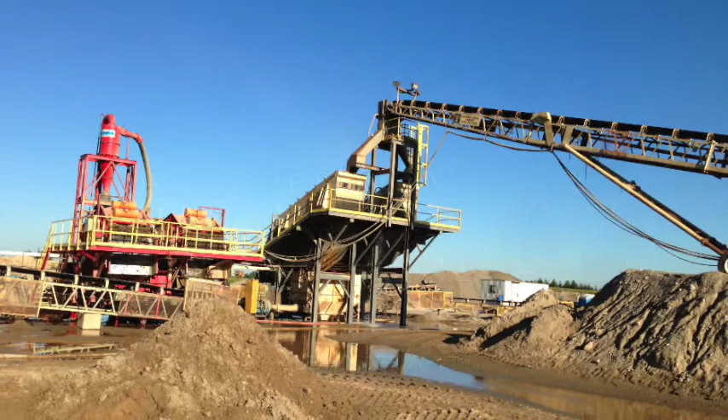For my presentation, I will be talking to you about the importance of building materials, a little history of St. Mary's and CBM aggregates, some background about Aberfoyle, McNally, and David sites, some of the major products produced, the hydrology and rehabilitation process. Also, we'll be talking to you about the processing of the aggregates, the quality control of concrete, asphalt, and foundation, and the quality control issues that come along with them.

We will be talking about 19 mil concrete stone, concrete sand, granular A and B, and then I will follow up with my conclusion, recommendations, and for you to ask any questions.

The importance of building materials. Building materials such as concrete, asphalt, and foundation are seen on almost every construction site around the world. Foundation material like granular A and B are usually intended for subbase within the pavement structure and backfill for construction projects. The foundation is used to establish solid and secure ground before erection of construction projects.

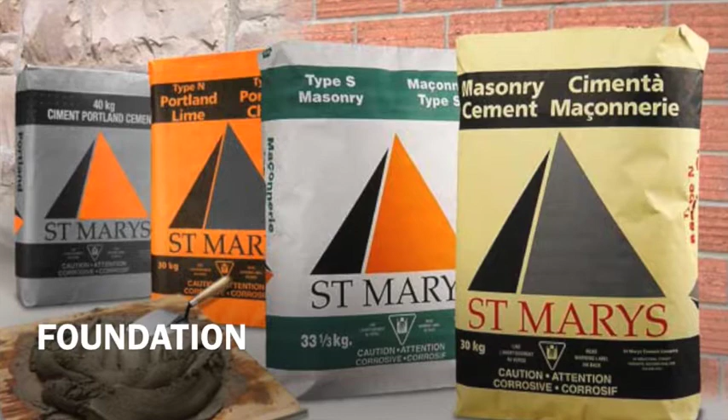Asphalt is the main component of the world's roadway system. It is laid on top of the foundation to create a surface that can temporarily withstand heavy pressures and harsh weather conditions. Concrete is a building material that is heavy and structurally sound to create and form a building or structure. This building material has been one of the most important to the world since it has erected long-lasting construction projects.

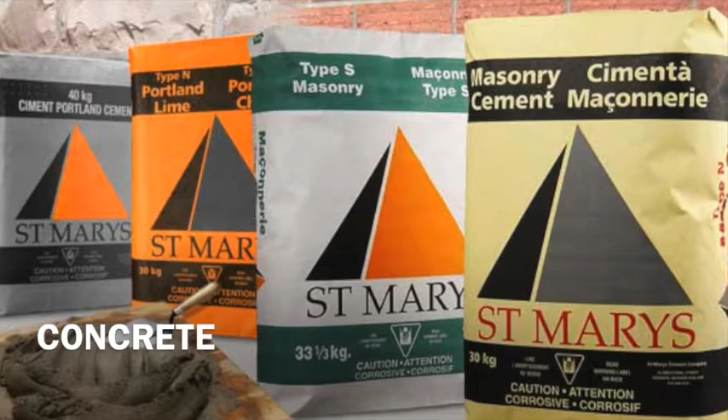St. Mary's Cement Group. St. Mary's Cement Group was founded in 1912 by John Lind and Alfred Rogers. The company is able to produce over millions of metric tons of material annually and helps to provide for Canadian and U.S. customers. Some of the projects St. Mary's Cement Group are best recognized for are the CN Tower, Maple Leaf Gardens, and the Roy Thomson Hall.

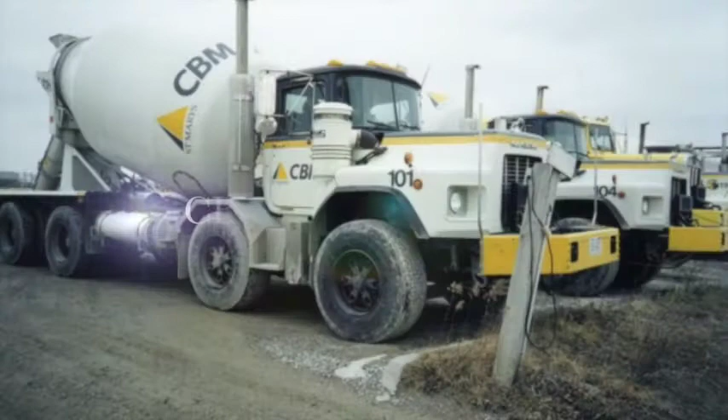CBM Aggregates. CBM Aggregates is a part of the St. Mary's Cement Group operation by producing over 140 million tons of aggregates annually for ready-mix trucks and construction sites. There are over 450 ready-mix trucks provided by CBM that deliver mixing machines that have made-to-order product that is usually time-sensitive. The construction sites may use the product for concrete, asphalt, and foundation. St. Mary's CBM has 12 sand and gravel operations and quarries that are in operation year-round.

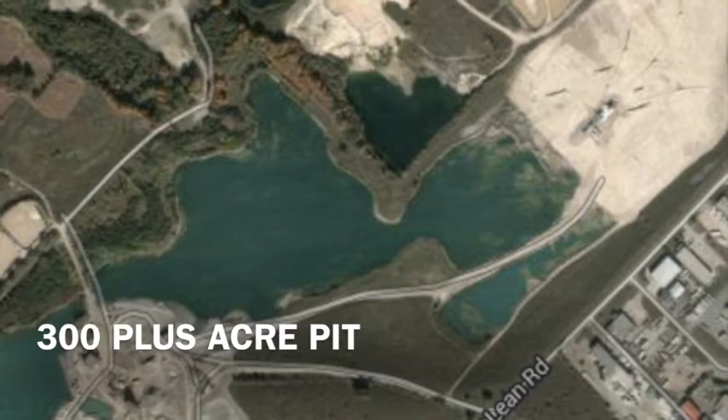Aberfoyle site. For my co-op, I worked out of the Aberfoyle pit. It is 300 plus acres and has been in operation since the 1950s and is considered the main site for CBM aggregates production in Ontario. The Aberfoyle operation is well monitored and has great production of the various building materials.

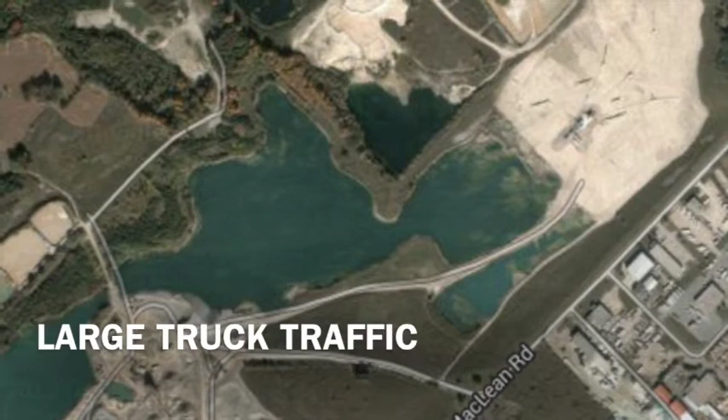This site has 3 front-end loaders for the material movement and 4 material conveyor belts with smaller conveyor belts for separation of material. This allows for a large quantity of transportation truck traffic and building material production. Aberfoyle Sand and Gravel Pit produces a variance of materials from coarse concrete stone to fine concrete sand.

The McNally site. Located across the road from Aberfoyle Pit, it is also operated by the Aberfoyle management and is sometimes considered Aberfoyle South. The McNally pit creates material for concrete and asphalt like Aberfoyle, however creates material more acceptable for asphalt elements. This operation creates HL8 for coarse stone products and HL3 material for asphalt density. McNally pit creates approximately 10 different products that vary from concrete aggregates to asphalt material.

The David site. The David pit is operational in Cambridge, Ontario. The David site is also only a short distance from Aberfoyle, and therefore the testing of material quality is completed by Aberfoyle's quality control. The David Operations is a large producer of granular A and granular B.

The David pit has one of the newest material shakers and is highly efficient when producing material for low moisture content. On average, a regular material shaker will have 24% moisture content, whereas David site's new material shaker will have 6% moisture content, saving a lot of material from being washed away.

The major products. CBM has numerous products available including concrete, crushed stone, round stone, and sand products. Each product is used for our ready-mix trucks that use different techniques of maximizing concrete.

The hydrology and environmental process. The Aberfoyle plant has been known for its hydrology and environmental process. The Aberfoyle plant works in a cycle starting with the lake, which is used as the Aberfoyle plant's only water supply by washing the material that is placed in the material shaker and separator. After the material is washed with the lake water, the water is then drained back into the ground for filtration and circulated back into the lake to be recycled.

The quality control technician sieves the recycled water periodically from the plant to examine how much material is being lost from the manufacturing process. After a period of time to allow for material to settle, the lost material is recycled into the plant and restored for production use.

The water that is recycled is clean and great for wildlife due to the filtration of sand and gravel throughout the Aberfoyle site. The water that is coming from the plant may look dirty, however, after settlement of the sedimentation, the water is clean and can support various wildlife.

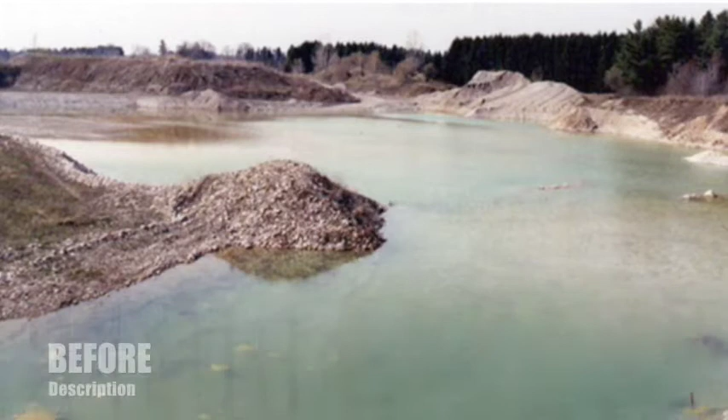Rehabilitation. Since the Aberfoyle pit has been in operation since the 1950s, the natural state of the grounds has been progressively rehabilitated. Over 30 hectares have been rehabilitated to support new agriculture, naturalized areas, ponds and aquatic wildlife, and a green environment. Rehabilitation of the Aberfoyle site has included land shaping, wetland and shoreland creation, seeding, aquamats, breeding grounds, and protected cover, and also ongoing tree planting.

This is a before and after of rehabilitation of a sand and gravel pit which has produced materials for Ontario for many years. This advancing rehabilitation process in the Aberfoyle sand and gravel pit has thriving wildlife and environmental structure that is returning the land back to its natural state. Aberfoyle Sand and Gravel Pit has achieved an award of excellence for the cooperation of environmental and business success within the Aberfoyle location.

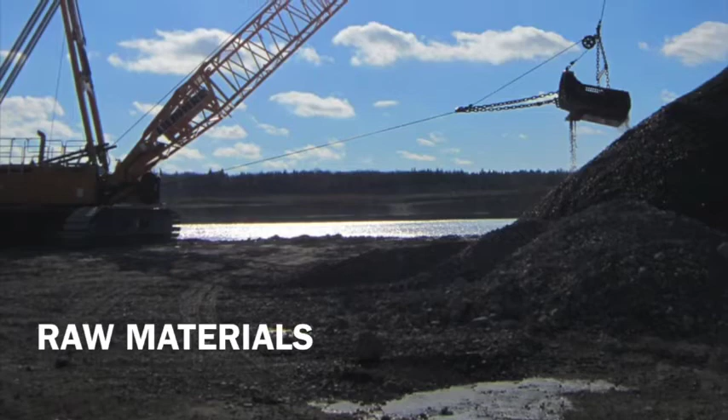Processing of materials. Processing of materials in CBM aggregates begins with raw materials. The raw materials include large and small stones, gravel, sand, and clay. The clay will be mostly disposed of through washing. The raw materials are mined and produced through quarries and the use of the dragline dredging crane, which is used to reveal raw materials that are then transported with conveyor belts and trucks to the Aberfoyle location.

The excavation process for Aberfoyle's site was once a pit that excavated material from their own site. Now it is mainly a middle ground for transporting raw material from nearby locations and manufacturing building materials to transport. The Aberfoyle site is a multi-source excavation process.

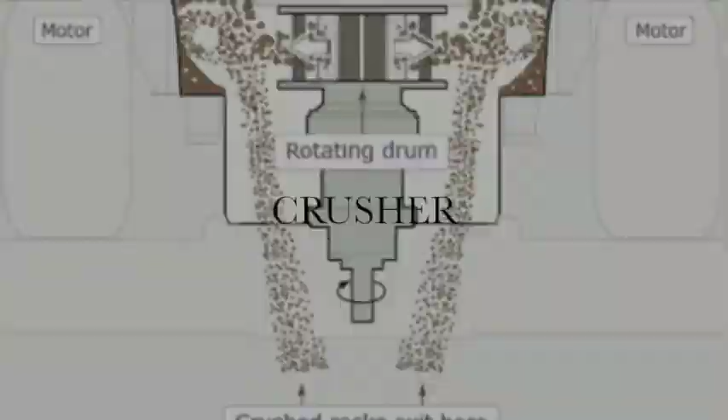The crusher. The crusher is the most important equipment for processing raw material. The raw material is placed in the equipment which crushes large material into smaller material. Large material enters the crusher, then passes a rotating drum which then crushes the material into smaller material, then into the sieves for separation. After the material has been crushed, it is brought to the sieve screens that will determine what size material goes where on the conveyor belts.

They use plastic sieves that are removable, so just in case one section breaks, it is easily replaced and production continues. These sieve screens allow the plant machinery to create a certain type of building material that requires established building standards. After the sieves sort the material, the more fine material needs to be washed of clay and have an accepted moisture content in order to satisfy specifications.

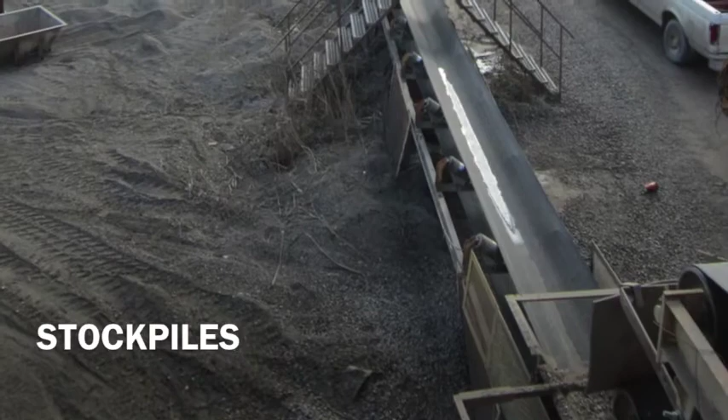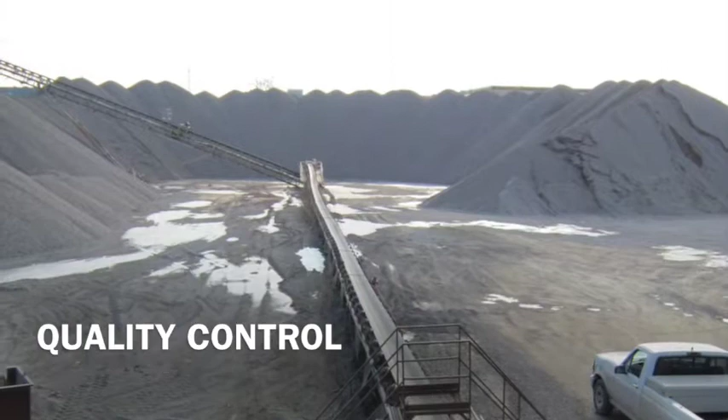Following the conveyor belts is the washed and processed material that creates stockpiles of predetermined building material. These stockpiles are usually 15 meters tall and have a 2-to-1 slope to create cone-like stockpiles. Finally, these manufactured products are tested by quality control to ensure high-caliber products are being constructed to specifications and building standards.

Quality control at CBM aggregates. Quality control in CBM aggregates is very important to ensure customer satisfaction and high-quality building material that is reliable and trustworthy. If the products used to create a concrete mix are not right by the ratio of coarse and fine aggregates, then the structural stability of the concrete product can be spoiled and therefore rejected as a building material.

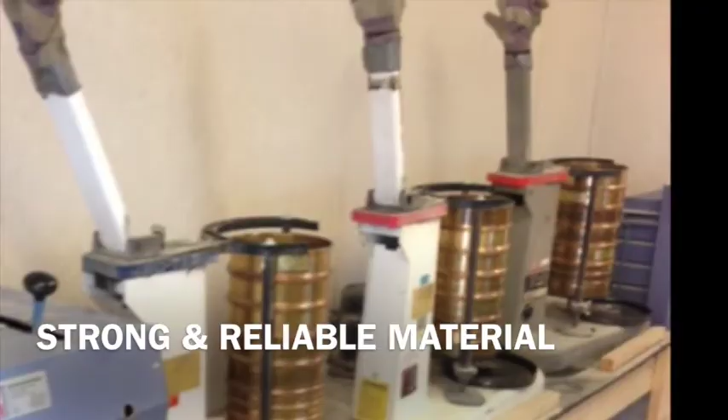Quality control in Aberfoyle Sand and Gravel Pit obtains the highest level by monitoring all products manufactured in 3 different plants. In order to have products for quality control testing for the day, CBM Aggregates must sample every product from each plant location. The day begins by collecting samples in the early morning from the night shift production.

A quality control technician or engineer will extract the appropriate size samples from stockpiles that were produced recently. For safety and randomized testing, sample pads of material are dug out 90 degrees of the stockpile. This is to ensure segregation hasn't occurred and to confirm random sampling of material from the stockpile. Also the safety factor, leaving the quality control technician out of harm's way.

There are normally 2 stockpiles for each material, a shipping stockpile and a production stockpile. The production stockpile is tested frequently to ensure manufacturing of product is qualified for standards. The shipping stockpile is the material that has been tested by quality control while being produced and has been settling for shipping purposes. This is tested to ensure the settlement process has not adjusted the material and caused change in material data.

After the samples have been extracted from the stockpiles, they are returned to the quality control lab where the material is split again into smaller samples to ensure true randomization and not to segregate material. Each product is oven dried, washed, and then oven dried again for moisture content. After being washed and weighed, the material is put through a sieve analysis and recorded into a computer database where the contents measured are evaluated. The computer database displays if the material is within customer satisfaction and building material standards.

Foundation aggregates. Not every location in CBM Aggregates produces fill and foundation because there are only some plants that can retrieve the material to manufacture the product. Granular A and B are the fill and foundation products that CBM Aggregates produces. These materials are developed through recycling of old materials such as sand, gravel, and concrete, and are fabricated for a compaction base. These products are a base layer for pavement structure, granular shouldering, and backfill.

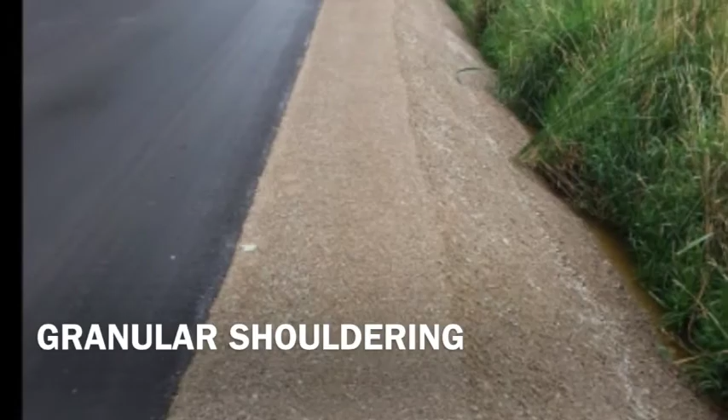Quality control issues. Issues arise in quality control just like in any other profession. Different material is loaded into the various treatment plants within CBM Aggregates and therefore causes different outcomes in material data. Every machine that works in the processing of material has functional delays and malfunctions. Quality control also faces daily human and electronic errors within the lab, and those problems must be faced and resolved before material and specifications are permanently damaged. These errors can be shown through 19 mil concrete stone, concrete sand, and granular A and B.

Quality control issues with 19 mil concrete stone. 19 mil concrete stone is one of the major aspects to making concrete. The concrete stone is the large gravel that is the strength and durability of concrete. 19 mil concrete stone has some quality issues that can spoil a shipment of the material.

It is crucial that the stone has a good ratio of larger stones to smaller stones within the compound to meet specifications. The particle shape and surface texture of the concrete stone can deeply affect the water and cement ratio content. If the concrete stone is rough textured, angular, and elongated, the concrete mix would require more water and cement to produce a workable concrete.

Quality control also has to keep under observation that there is no segregation of the size of stones. If the concrete stone is segregated and in favor of the larger stones, then there will be an increase in concrete void content, which affects the amount of cement paste required for the concrete mix.

Quality control issues with concrete sand. Concrete sand is a key material in the manufacturing of concrete and is the small aggregate that is the strength, hardness, and durability of concrete. Quality control can have many issues that take time and patience with concrete sand due to its sensitive machinery and size of particles.

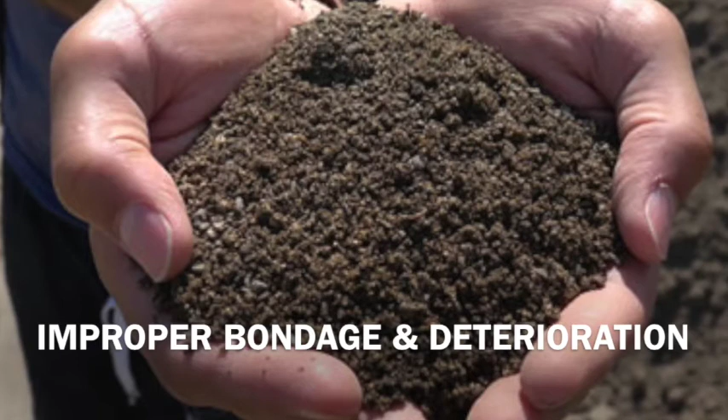Concrete sand can be very dirty with clay because of raw material that was placed into the refinement plants. Aggregates for concrete need to be cleaned to ensure no residue mixes with the water and cement, which can cause improper bondage and deterioration of concrete.

Just like concrete stone, the particle shape and surface texture of the concrete sand can deeply affect the water and cement ratio content. Quality control has the largest variances of problems with concrete sand. This includes monitoring moisture content, cleanliness, and segregation.

Quality control issues with granular A and B. To ensure full quality control for granular A and B, two different sieve analyses must be completed for each sample. One sieve analysis for the coarse aggregate and another sieve analysis for the fine aggregates.

An issue with the quality control of granular A and B is that when completing the required sieve analysis on the products, some material is lost due to washing, drying, and splitting into workable samples. Granular A and B, when dried, have dust-like qualities within the product. So when transporting and splitting into workable sample sizes, dust and other material particles escape from the overall samples.

Even though granular A and B specifications are in large range, the escaping material can cause obscure data within the standards and specifications. Finally, the conclusion. For my conclusion, I would like to bring forward key facts of my presentation.

Concrete is known for being one of the strongest building materials construction has to work with. It has helped shape our cities and society to what it is today by withstanding time and erosion. Granular A and B are the foundation and backfill for every construction site to make sure the ground level is safe and secure before the vertical erection of structures are formed.

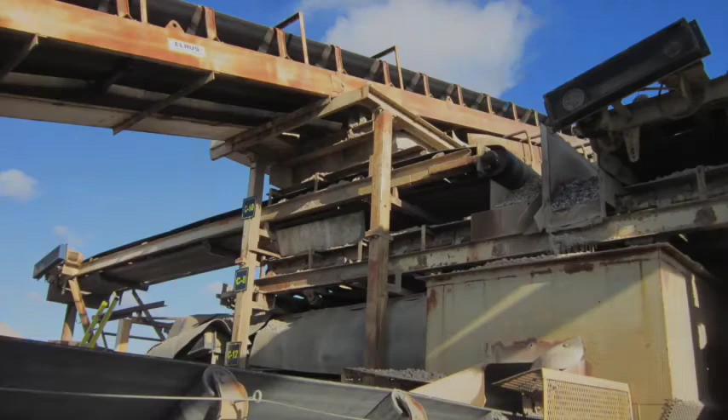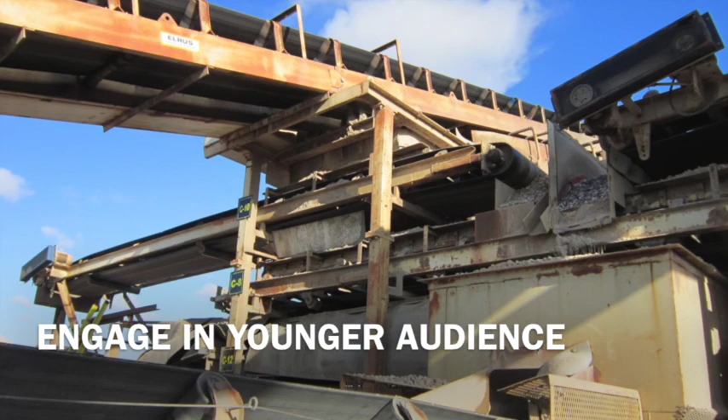My recommendations. In order to complete this, I asked the question, if you could change anything, what would it be? Through the experience of working at CBM Aggregates in the Quality Control Division, the only recommendations are to engage younger audiences and students. The quality control technicians are experienced adults that have been employed in the construction field their entire careers. Students have limited knowledge of the opportunities that are available for quality control technicians.

With the younger audience captivated by the career opportunities, it will induce a larger demand for jobs involved in the quality control of building materials for the construction industry.